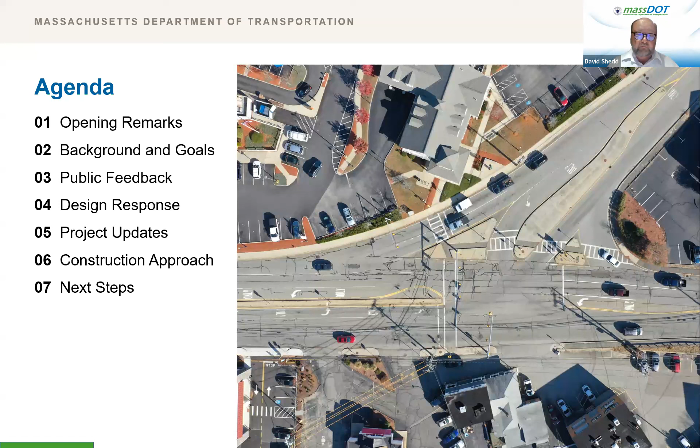We will also discuss concerns identified in the meeting and how MassDOT has responded. Lastly, we will briefly go over the construction approach on this project before providing contact information and offering a Q&A period.

So before we get started, I would like to introduce the members of tonight's panel. From MassDOT, besides myself, we have Brian Fallon, the MassDOT District 4 Project Development Engineer. From the consulting firm Howard Stein Hudson, we have Peter Wroblewski, who is the project manager, and Jessica Litza, the manager for traffic engineering. Our producers tonight are Leah Grodstein and Hung Pham.

This public meeting was advertised in the Daily Times Chronicle on July 25th and August 1st of 2023, and the Lowell Sun on July 25th and August 1st. The flyer and meeting notice was shared with the towns of Burlington and Billerica for their use to post on local media outlets, as well as with the organization People Helping People. The hearing information is also shared throughout the MassDOT website, the MassDOT Facebook account, and the MassDOT Twitter account.

How did we get here? On November 17, 2022, MassDOT hosted a public informational meeting to present this project. The meeting was very well attended with lots of great feedback and comments, both positive and negative. After the hearing, given many of the concerns that were expressed at that meeting, MassDOT engineers decided it would be a worthwhile exercise to ask the consultant, Howard Stein Hudson, to do a reevaluation of the traffic design of the corridor to ensure that we were proposing a design that provides a balance between optimum safety without compromising traffic operations.

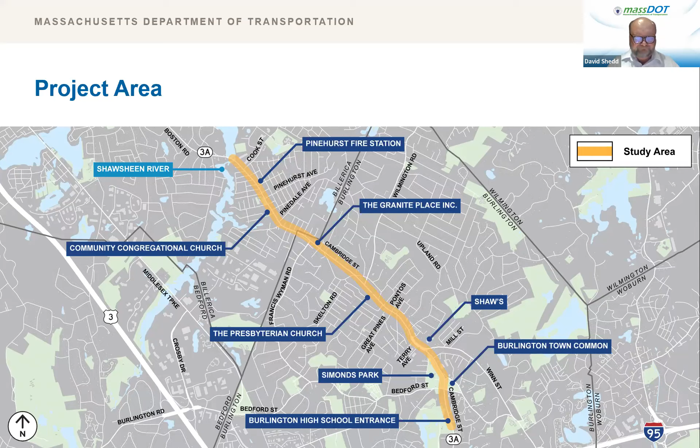Project needs. Route 3A was initially selected for pavement maintenance by the MassDOT Pavement Management Group. The segment of Route 3A has potholes, cracking, and minor raveling of the pavement along the route. This is typically a simple process of removing 2 inches of pavement and replacing it with more pavement.

In addition to the pavement deficiencies, there's some safety concerns within the corridor related to the excessively wide lanes, which encourage high speeds, force vehicles to occasionally cross the double yellow line for passing, make it difficult for vehicles taking a left turn when exiting adjacent businesses and residences, as well as other safety issues. The consultant reviewed the existing traffic conditions and crash data to determine the appropriate countermeasures to these safety issues.

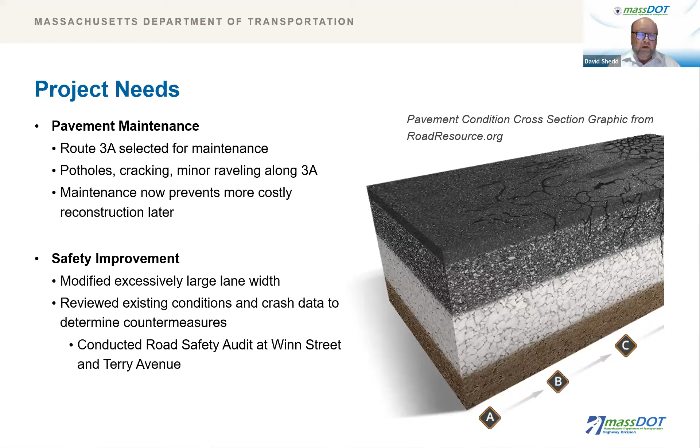In addition to meeting those two goals of maintaining the roadway surface and improving safety, this project also provides improved accessibility for pedestrians, transit riders, cyclists, as required by state and federal regulations. The project is currently estimated to cost just over $7 million. Funding is coming from both state and federal money, which requires us to follow all state and federal requirements in order to capture the funds. This includes following all Complete Streets initiatives required to the maximum extent possible.

Next slide. So the progress since November. I'd like to talk now about what MassDOT has been doing since our previous public meeting regarding the project and how the public feedback altered our design.

During the previous public meeting held in November 2022, we received lots of public feedback regarding this project. During the meeting, there were some who voiced support for the project and many who expressed concerns. We received many emails following the meeting, both supporting and also expressing concern. We heard concerns that the previous traffic data that we used in our analysis was collected during the COVID pandemic, and the impact that may have on the design and the traveling public.

Some of the written concerns were related to bike lanes, road surface, traffic noise, pollution, project communication, safety, and traffic congestion. We also received messages expressing support for the project, specifically identifying the improved accessibility for all users, improving the condition of the roadway, and most of all, improving safety in the corridor. Each individual comment that was sent to MassDOT received a written response.

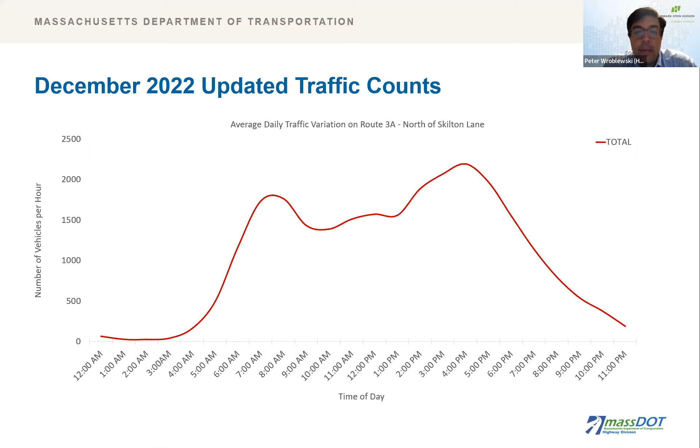The chart on this slide presents the volume of vehicles traveling along Route 3A per hour throughout the day, collected at one of the 48-hour continuous counting stations. The chart reflects the significant morning and evening commuting traffic through the corridor. We used the new traffic data to perform a detailed traffic analysis along the corridor.

The analysis showed that under the previous design, there were some traffic backups expected at the merge from 2 lanes to 1 lane north of the intersection with Skilton Lane. Additionally, the model showed traffic backups and delay expected south of Bedford Street through the intersection with the high school if the roadway was formalized with 1 lane in each direction. With this additional information, we adjusted the design in these areas to mitigate these impacts to the best of our ability while still improving safety and providing bicycle accommodations where we can.

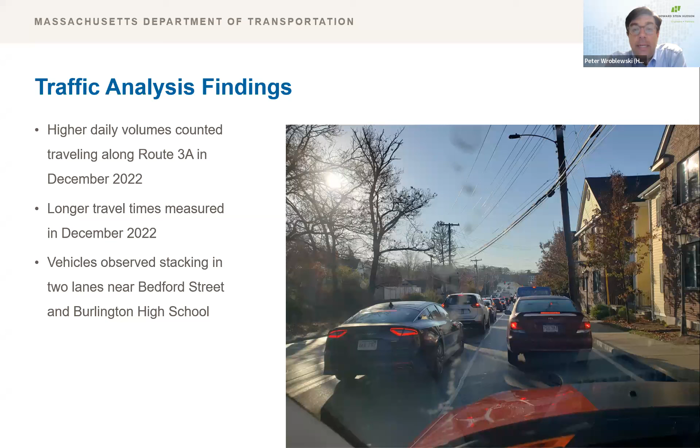The merge from 2 lanes to 1 lane, which previously occurred at Skilton Lane, was shifted further north and provided a longer distance to merge over to reduce the traffic backups anticipated from the merge. South of Bedford Street, the design will no longer propose to formalize 1 lane in each direction and will instead maintain the existing roadway geometry.

The traffic data collected on Route 3A between Bedford Street and Burlington High School shows that traffic volumes peak with typical commuting hours, as well as school arrival and dismissal. This means the significant queuing resulting from the 2022 design, which introduces bike lanes, would likely be experienced for multiple hours throughout the day.

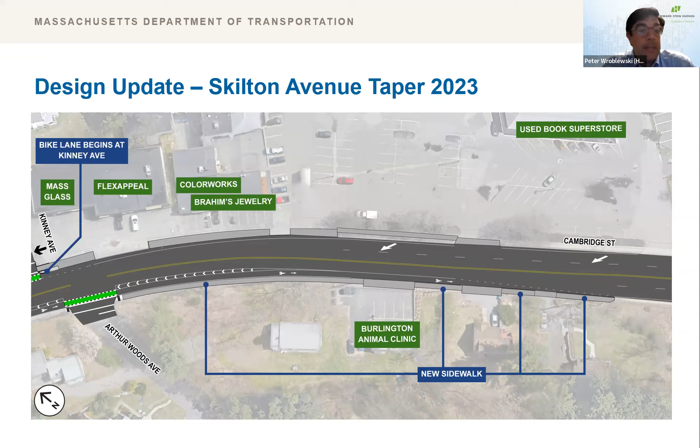Thanks, Peter. Now we'll discuss the construction approach for the project. MassDOT will have a resident engineer on site to ensure all work is done according to the approved contract documents. Coordination between the contractor and the towns regarding the schedule of construction operation will be facilitated by the resident engineer through regular meetings. During construction, existing travel lanes will be maintained as much as possible to limit travel disruption. Only short-term temporary lane closures are anticipated. Access to adjacent businesses and residents will be maintained at all times.

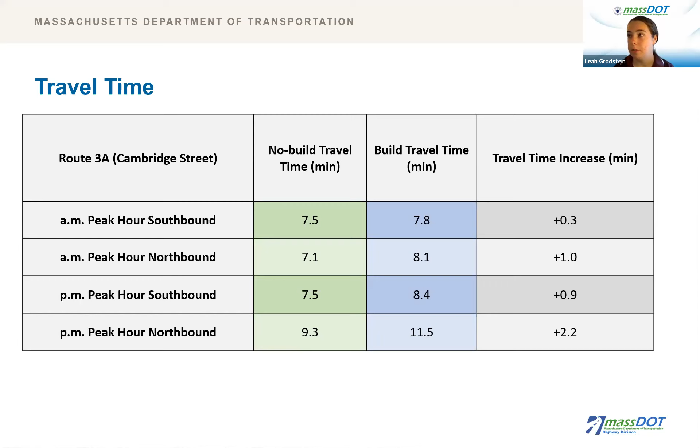Okay, I think based on the lack of people identifying themselves in the Q&A, that might take care of all the public or elected officials. If it doesn't, we apologize, and you can certainly participate in the public Q&A as well. So I'm now going to officially open us up for public comment.

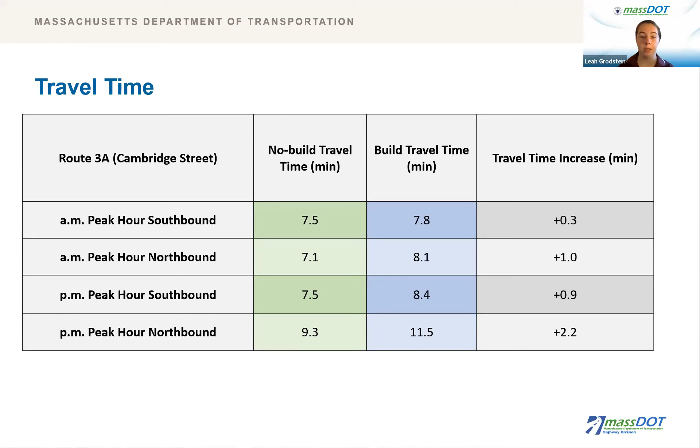Since I'm already talking, I'll just take one question from the Q&A, and then we'll swap back to the raised hands. So I'm going to read a question from Peter Hodges. Is there a reason you're not addressing expanding 3A to 2 full lanes, as the road is currently being used de facto as a 2-lane road? Thank you, Peter. Yeah, Peter, that's a good question.

You know, this project started off, and it's pretty much a resurfacing project. One of the constraints we had is we wanted to try to work curb to curb. So if we were to put in a full 2-lane road each direction, with the required bike accommodations and sidewalks, it would require a lot of property taking, and it'd be a lot of widening too. So that was pretty much not in the scope of this project.

Absolutely, having a larger project for this area would be something that might be worthwhile for the towns to look at. But it would be a separate project, and we're doing a resurfacing, and we're already at 7 million. So you can imagine that project would be a lot bigger project. So that's pretty much what the constraints we had with this one.

Yeah, and just to piggyback on that a little bit, Dave, because I think that's a great answer, and I think a lot of people will have a similar question. When we talk about maintenance, this is obviously going to be a big project, and it's going to be a lot of construction. And I think when people hear the term maintenance, they think minor work. When we're saying maintenance, we're maintaining the infrastructure that's out there.

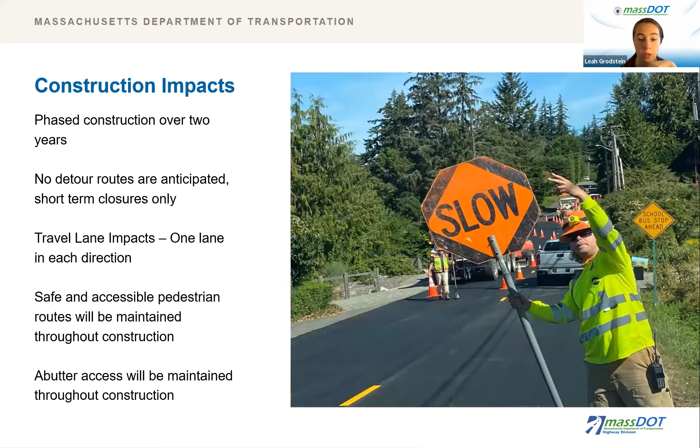All right, thank you. The next question, also from a town meeting member, precinct 6, Daryl. For the project area south of Bedford Street, where bike lanes were removed from the previous design on slide 15, will that section of the roadway be marked as 2 lanes in both directions? If not, that indicates that the roadway is not wide enough for 2 lanes and the road should be traveled as a single lane there. Please elaborate about how removing the bike lanes in that area represents an improvement if the roadway is a single lane with and without bike lanes.

Thanks, Daryl. Yeah, I think what we were trying to do there is manage the queue lengths. So, if you're coming up to Bedford Street, heading north, if you have people stop there to take a left turn, you're gonna have some queuing. So I think, and Peter, you can jump in too, but I think that it was taken out not so much as a travel lane, but to manage the queue lengths at the intersection so we can get more people through for each cycle.

Yeah, this is where it gets tough, Daryl, and you're right. That's a great comment. I'm going to ask Jess to comment here on the design, but this is an area where it does operate as 2 lanes. And when we went out, our staff went and drove the corridor. We did field visits and we took traffic counts and we measured all these things. And again, everyone here knows this who drives this. It does operate as 2 lanes.

And while that's not the formalized lane width, and it's not a design that we would propose on a new road, we recognize that putting bike lanes on there would significantly increase the queue lengths, as Dave was saying, which would go backwards and block intersections and make some pretty unsafe conditions at intersections. And so based on that assessment, MassDOT decided at our recommendation that we remove these bike lanes in order to not create that queuing issue. And Jessica, if there's anything you'd like to add, I appreciate it.

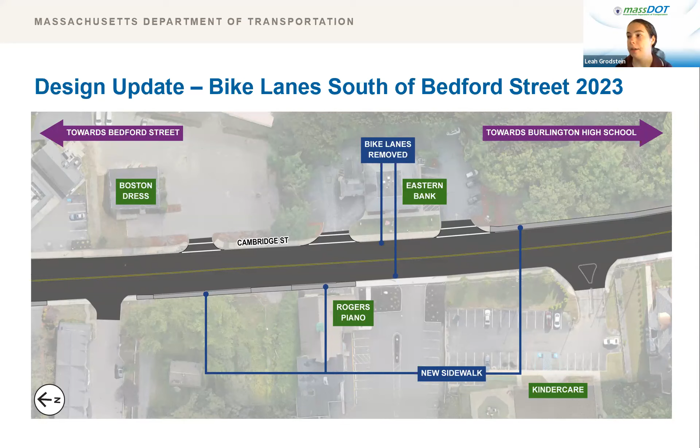All right, thank you. And I know there's a bunch of raised hands, so I'm just going to take one more question from the Q&A from a town meeting member, Betsy Hughes from Precinct 7. One of Betsy's questions was, do you have any sense of how much of the traffic on this road cuts through to avoid Route 128 or Route 3? Thank you, Betsy.

I don't know if we have that information available tonight. I mean, I know if 128 or Route 3 is backed up, 3A gets flooded with traffic. That's typically what happens. But I don't think we have any data on that right now. I'm not quite sure people use it as a cut through unless one of those 2 roads is backed up. But I don't think we have specific data on that to present tonight.

All right, and I know I see a lot more comments and questions in the Q&A, but I also see a lot of raised hands, so I'm going to turn it back over to Hung for a while so that those people get a turn to speak too. Thank you. I'm going to go through 3 raised hands. First off, I have a list running right now. John, I'm going to give you the floor.